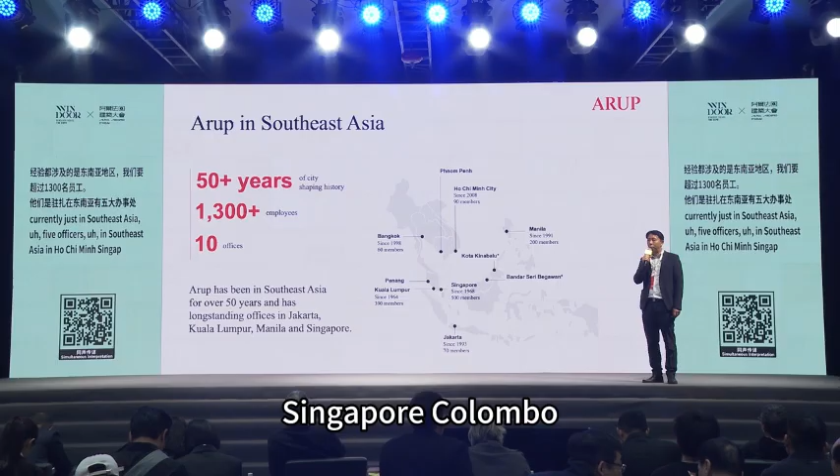So in Arup, we have more than 50 years of experience in Southeast Asia. We have more than 1,300 employees currently just in Southeast Asia, with 10 offices in Southeast Asia in Ho Chi Minh, Singapore, Kuala Lumpur, Indonesia, and Manila.

So I'm going to talk about our Southeast Asia property trends. I'll first start out about the opportunities and challenges that we face in the facade market in Southeast Asia. These are the different aspects or typologies of projects that we dealt with in Southeast Asia.

First, we deal with existing buildings or mixed developments. How do we actually enhance the existing values or the assets in, say, a shopping mall or mixed development? When we delve into that, we talk about sustainability, how we improve the thermal performance of the facade or the building envelope, and how we can reduce carbon.

In some of the sports projects that we take part in, we look at multi-use and also sustainability. Asset enhancement is also an everyday kind of typology that we come across.

When we talk about asset enhancement, we deal with the property developers to explore how we can increase the value of the project, how we can impose sustainability values into the project to make it sell better, and also to portray that the developers themselves are doing their part in terms of sustainability to the environment.

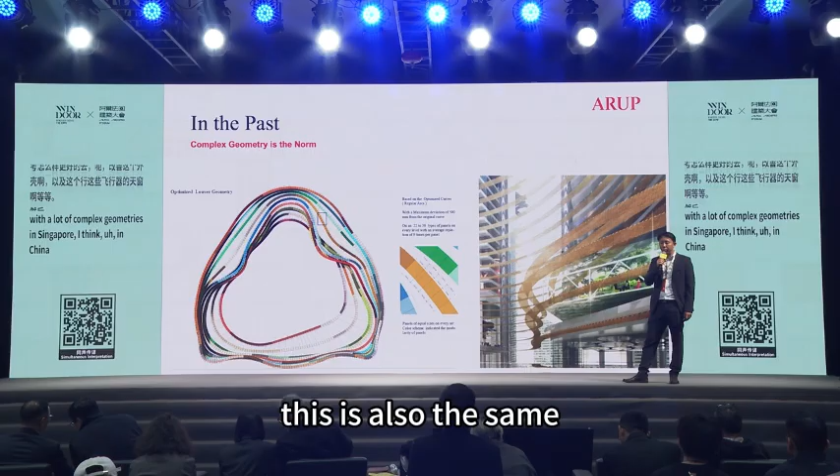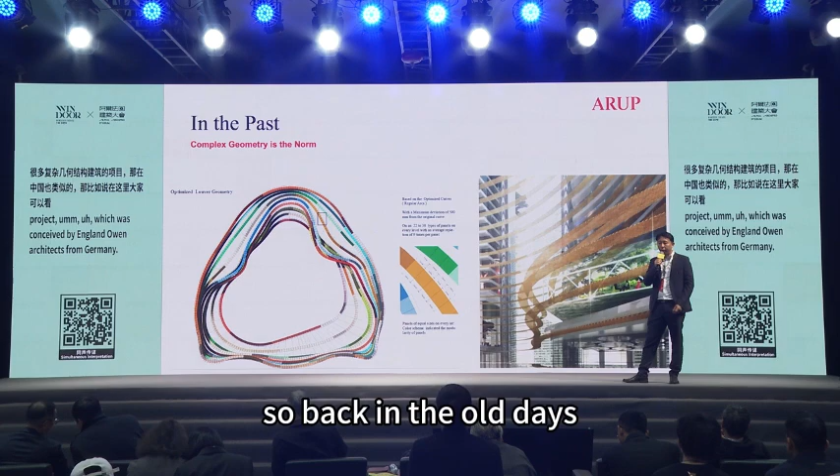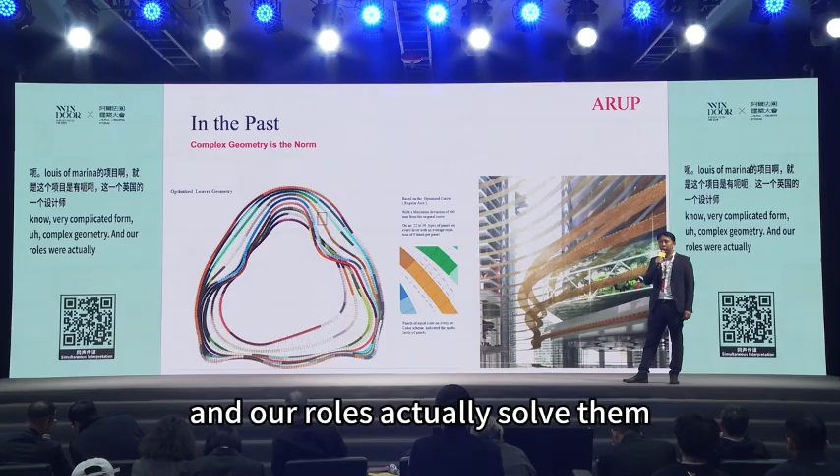So in the past, we dealt with a lot of complex geometries in Singapore. I think in China, this is also the same. This diagram is actually the louvers of the Marina One project, which was conceived by Ingenhoven Architects from Germany. Back in the old days, architects liked to design the building envelope in a very complicated form, complex geometry, and our role was actually to solve them and rationalize the modules of the facade panels, sunshades, or fins and make the architect's intent work.

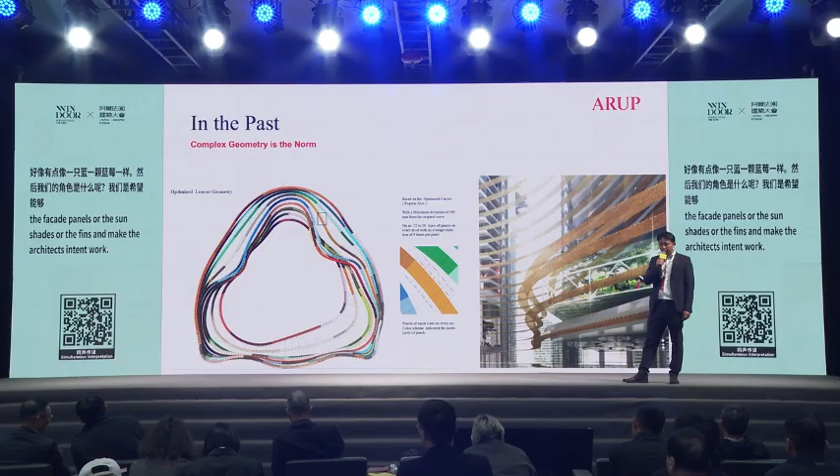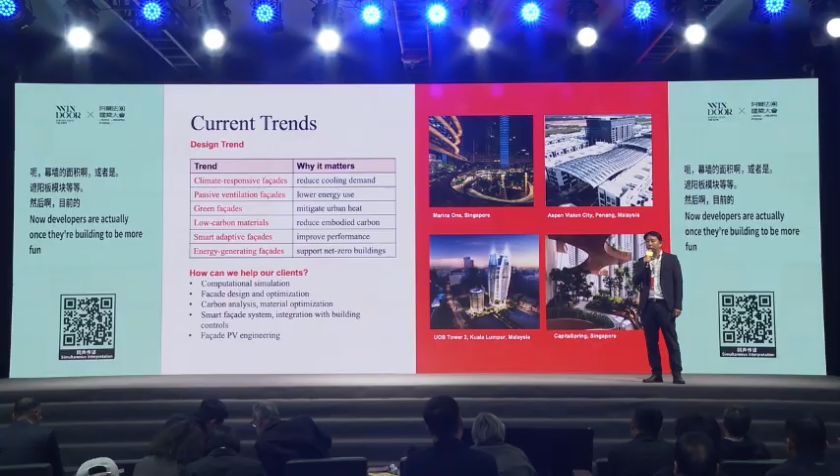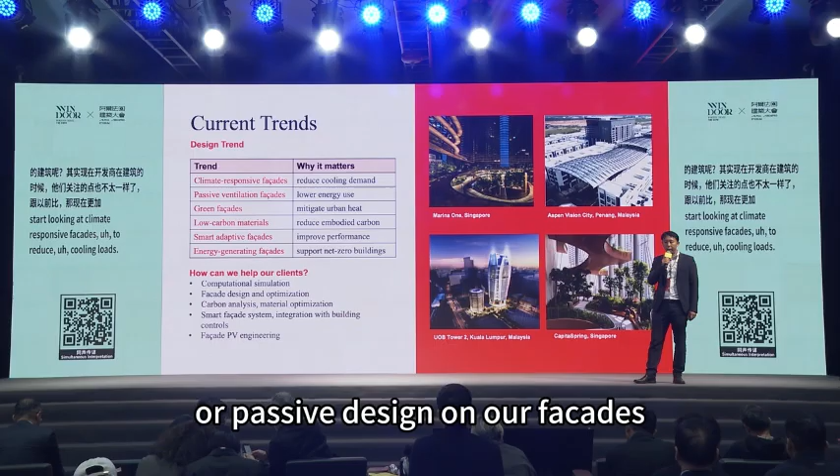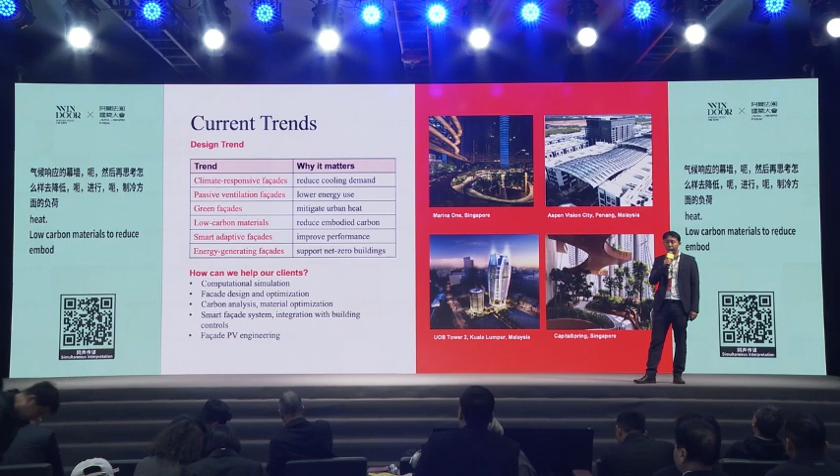But currently, complex geometries is actually passé. Now developers actually want their building to be more functional, more sustainable. So then we had to start looking at climate responsive facades to reduce cooling loads, or passive design on our facades to reduce energy use, green facades to mitigate urban heat, low carbon materials to reduce embodied carbon, smart adaptive facades to improve thermal performance or the energy performance of the building, and energy generating facades to support net zero buildings.

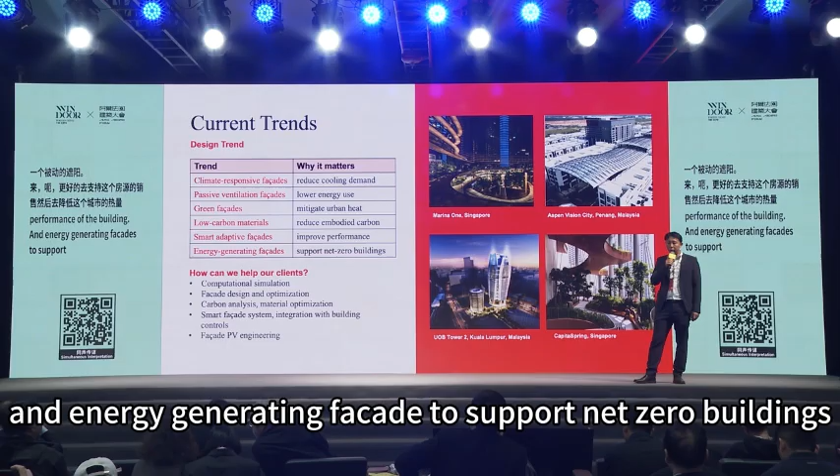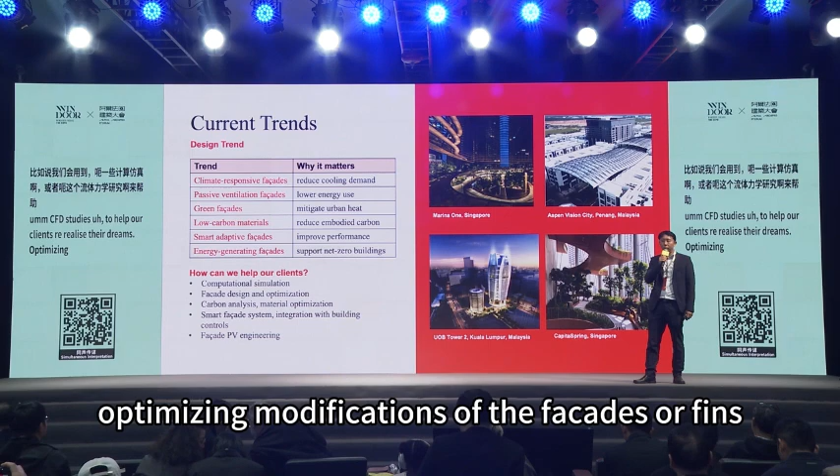So how do we normally help our clients achieve their goals? We do things like computational simulations, CFD studies to help our clients realize their dreams, optimizing modifications of the facades or fins, and embodied carbon analysis to study options on how to reduce carbon footprint.

Sometimes we may integrate smart facade systems, or how to integrate electrical controls for sun shading purposes. And in some cases now, BIPVs on facades.

This is an example of what our Singapore government is trying to achieve in terms of sustainability. For national and public sector projects, there's a big commitment to have 80% energy improvement over projects that were built in 2005.

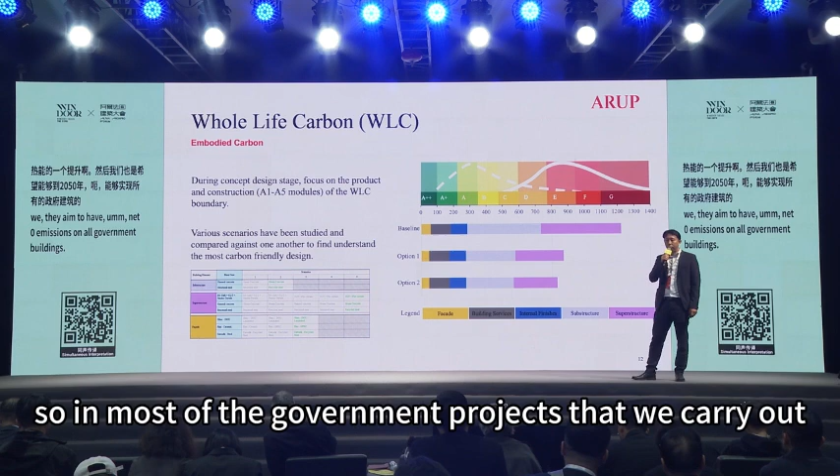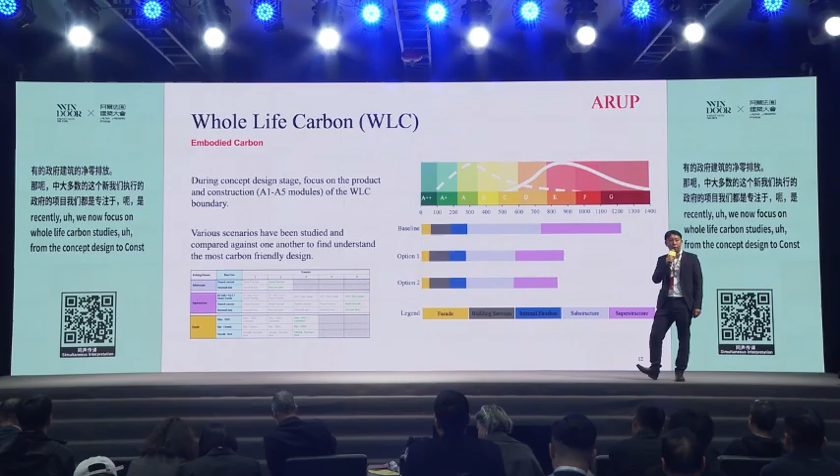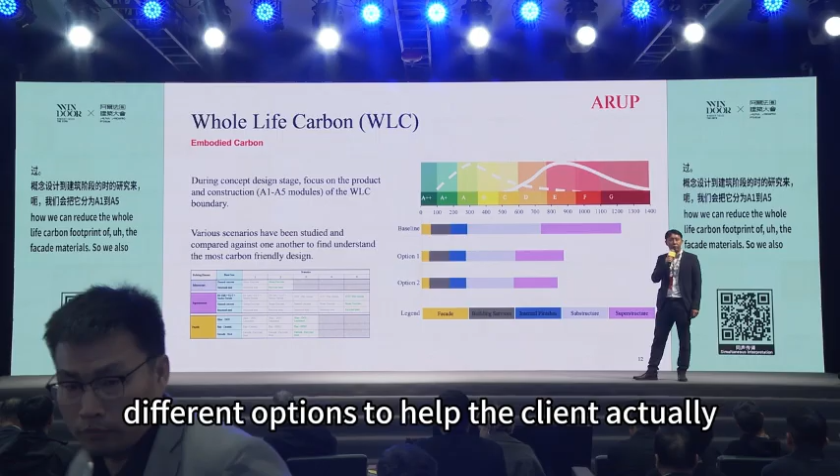And by 2050, they aim to have net zero emissions on all government buildings. So in most of the government projects we carry out recently, we now focus on whole life carbon studies. From the concept design to construction stage, we study in terms of A1 to A5 modules, how we can reduce the whole life carbon footprint of the facade materials. So we also studied different options to help the client reduce embodied carbon.

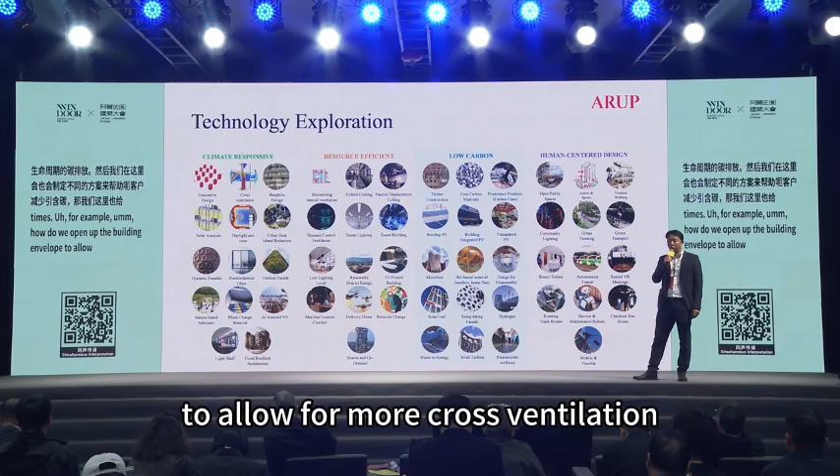These are some of the examples how we explore different technology in current times. For example, how do we open up the building envelope to allow for more cross ventilation through the building facades? The types of glass we can use to improve daylight on the buildings.

In terms of resource efficiency, we looked at smart building technologies, hybrid cooling systems, low carbon materials. In some cases, we look at how we can open up some of our sky gardens to encourage public participation in the spaces.

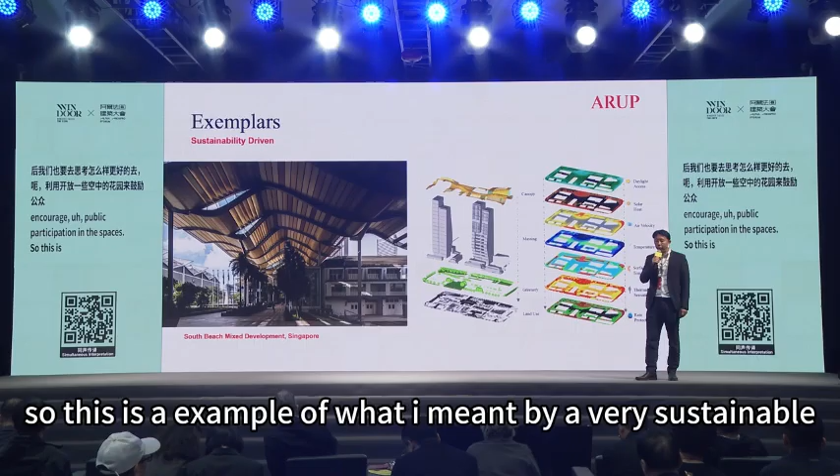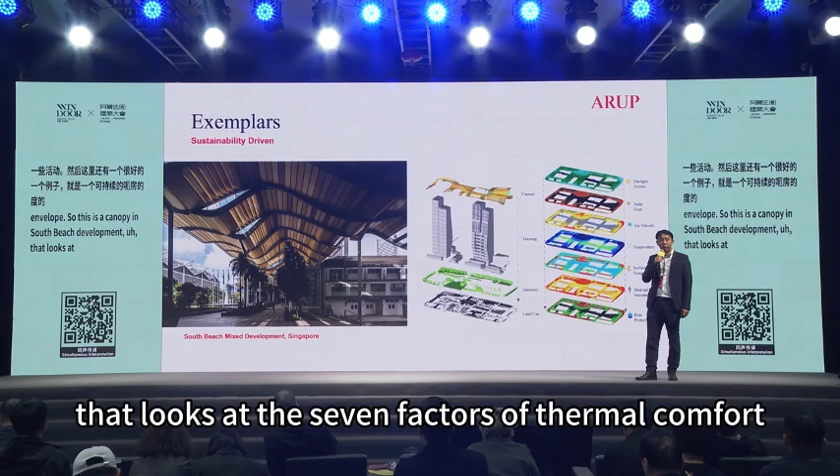So this is an example of what I meant by a very sustainable facade building envelope. This is a canopy in South Beach development that looks at the 7 factors of thermal comfort when you are using the space below, from daylight.

How to harvest natural daylight into the canopy space so that we eliminate the use of artificial lighting during the day, and how we can reduce solar heat gain through the canopies, and how we can allow air to blow through the canopy so that it doesn't feel so hot during the hot afternoon summers in Singapore.

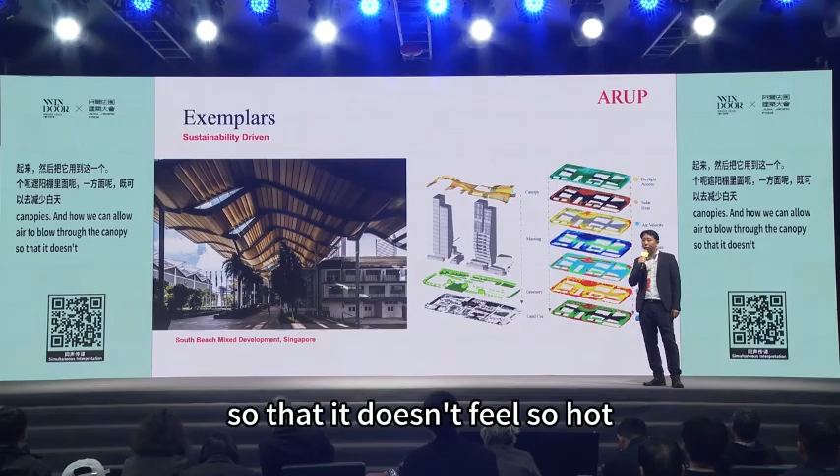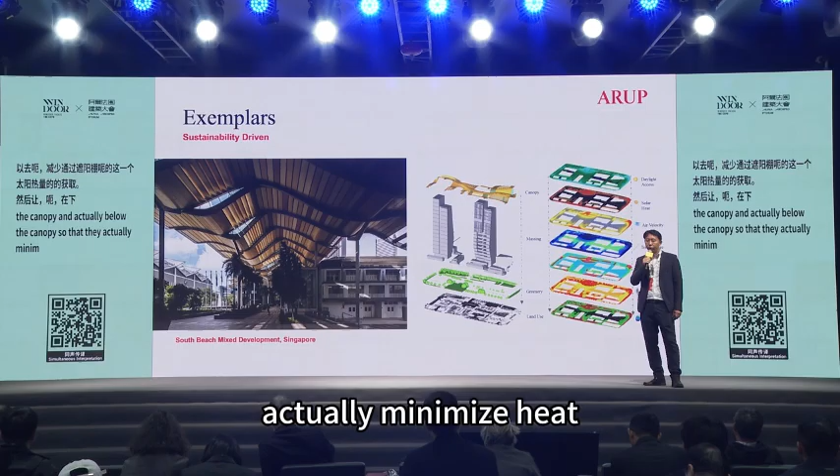We also studied surface temperature of the materials on the canopy and actually below the canopy so that they minimize heat transmission from all this material to the human body. Thermal sensation as well as sun and rain protection.

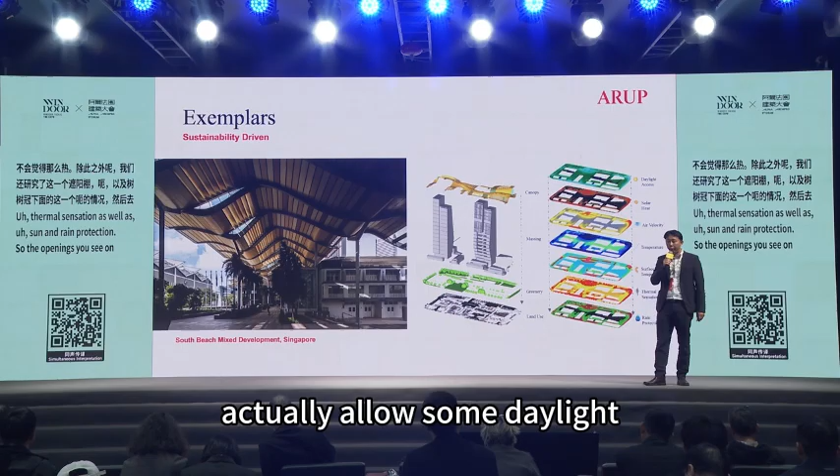So the openings you see on this canopy actually allow some daylight, and the louvers are not closed so that they allow air to flow through, yet can provide the wind-driven rain protection for the spaces below.

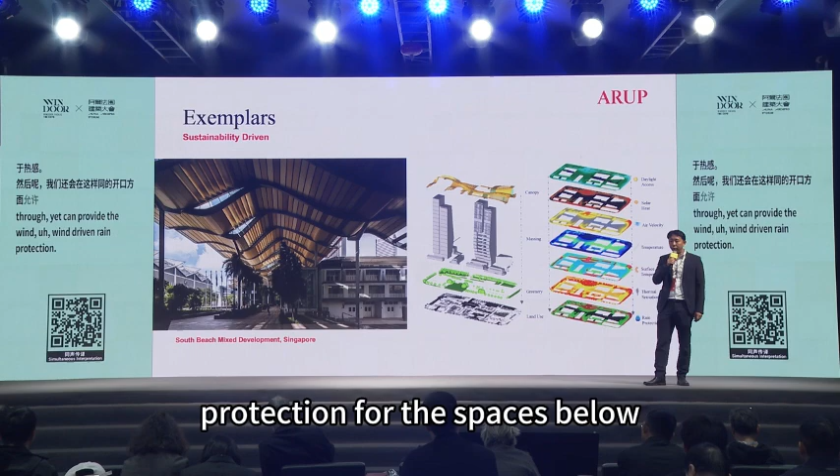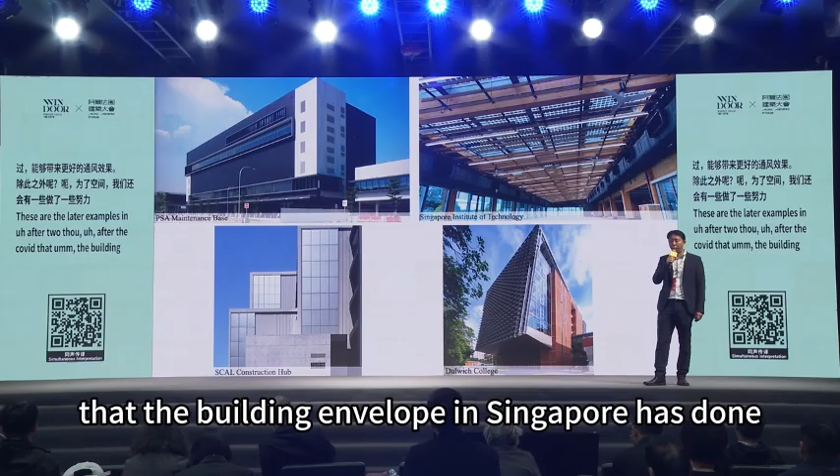These are the later examples after COVID that the building envelope in Singapore has done. Okay, we have BIPV facades, BIPV glass on canopies.

Okay, then now I'll talk about construction challenges in Southeast Asia. These are trends that I think the Chinese market can actually take note of when they try to enter Southeast Asia.

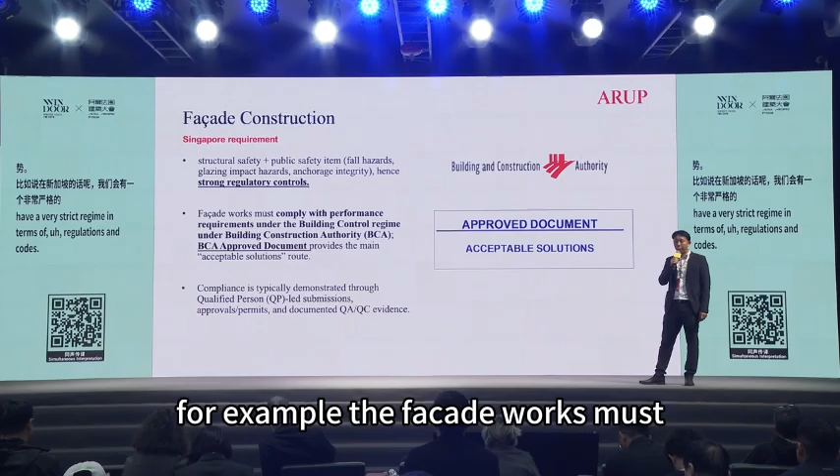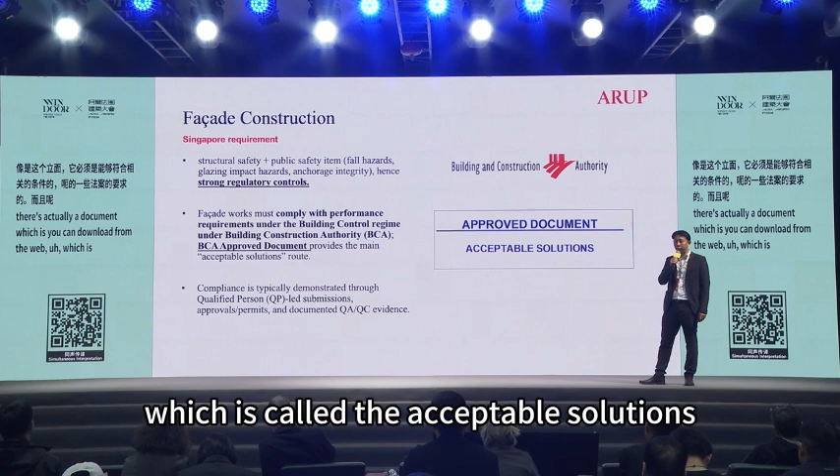Typically, in Singapore, we have a very strict regime in terms of regulations and codes. For example, the facade works must comply to the requirement under the Building Control Act in Singapore. And that's a document which you can download from the web, called the Acceptable Solutions for the Facade market.

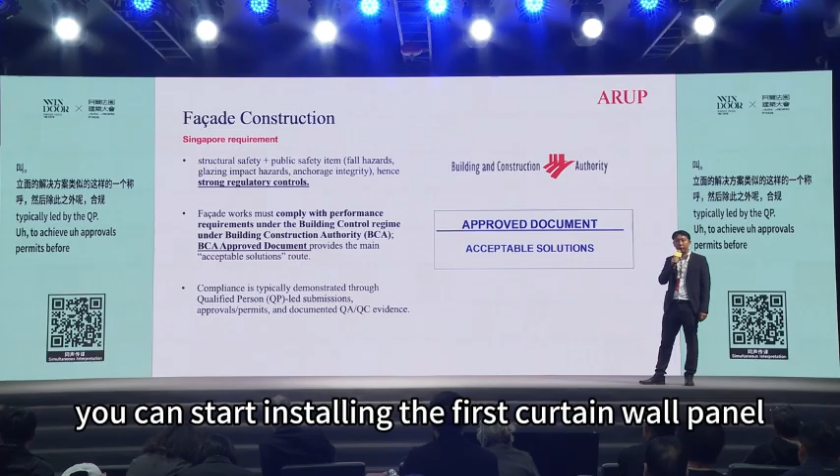Right, compliance is typically led by the QP to achieve approvals, permits before you can start installing the first curtain wall panel. And in that submission, there is also a series of documents that the QP needs to submit.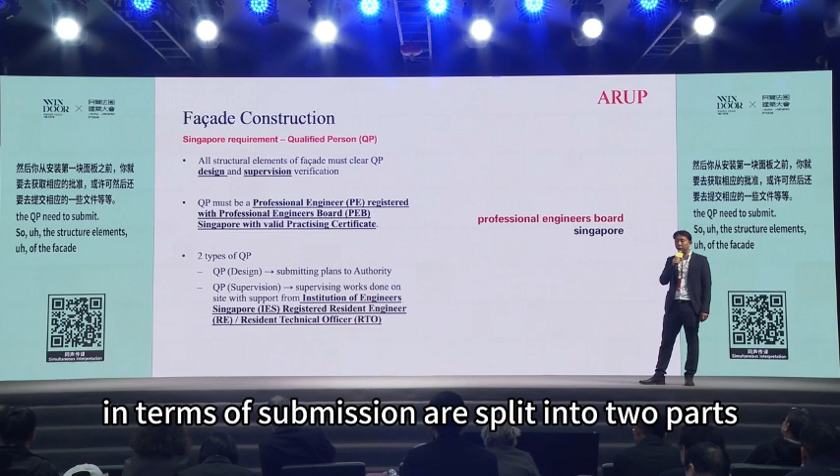So the structure elements of the facade in terms of submission are split into two parts. One is called the design submission and the other one is called the supervision verification. So the QP is called a qualified person. He must be a professional engineer registered with the PE board with a valid practicing certificate.

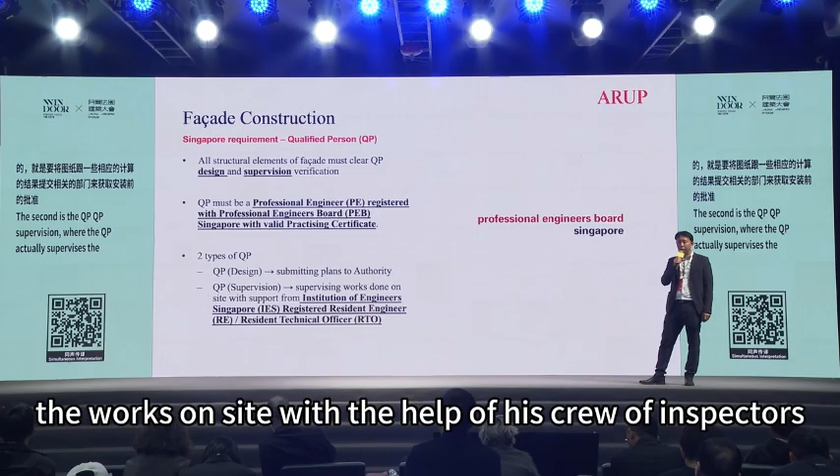Right, in the entire scope of works from design to construction is split into two. One is called the QPD, which is the design, where he submits the drawings and calculations to the authority to get approval before installation. The second is the QP supervision, where the QP actually supervises the works on site, with the help of his crew of inspectors. We call them the resident engineer or the resident technical officer.

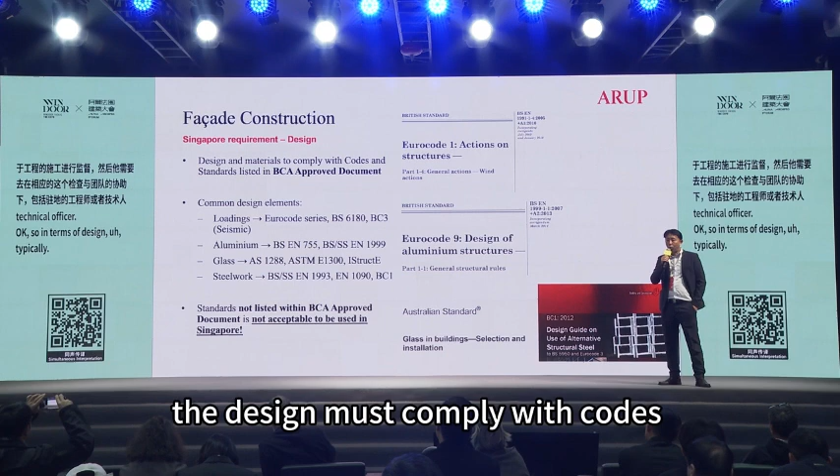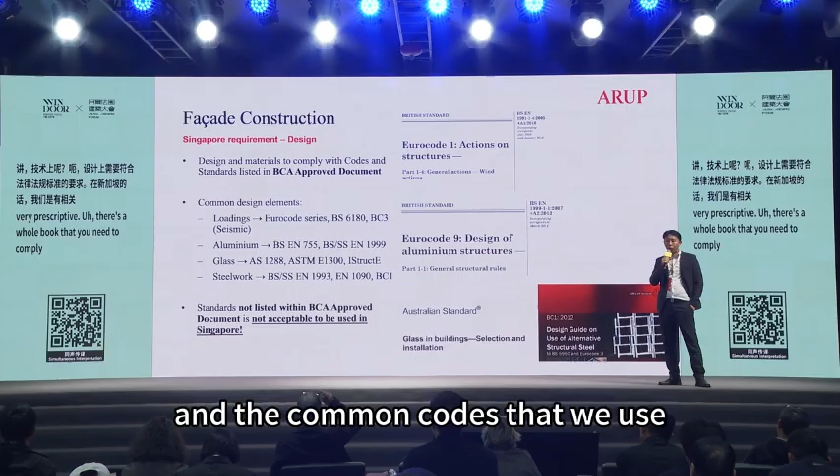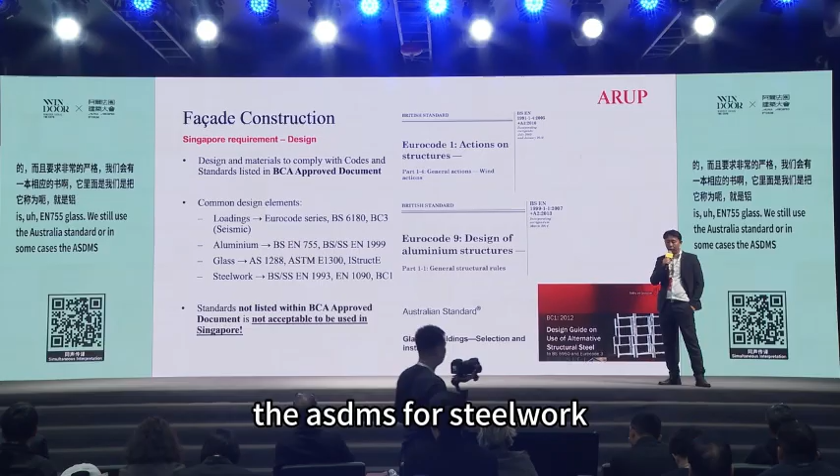In terms of design, typically the design must comply with codes and standards listed in BCA. In Singapore, the codes and standards are actually very prescriptive. There's a whole book you need to comply with, and the common codes we use are the Eurocode series. For aluminium it's EN 755. For glass we still use the Australian standard, or in some cases the ASTMs. For steelwork, we still use the British or Euronorm 1993.

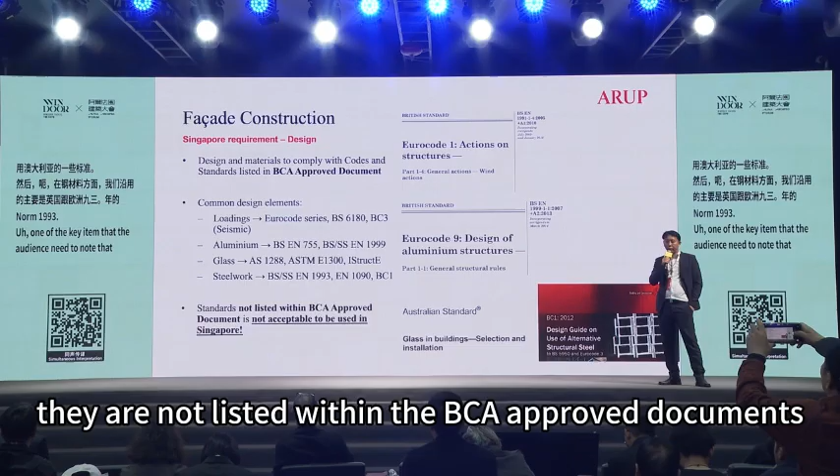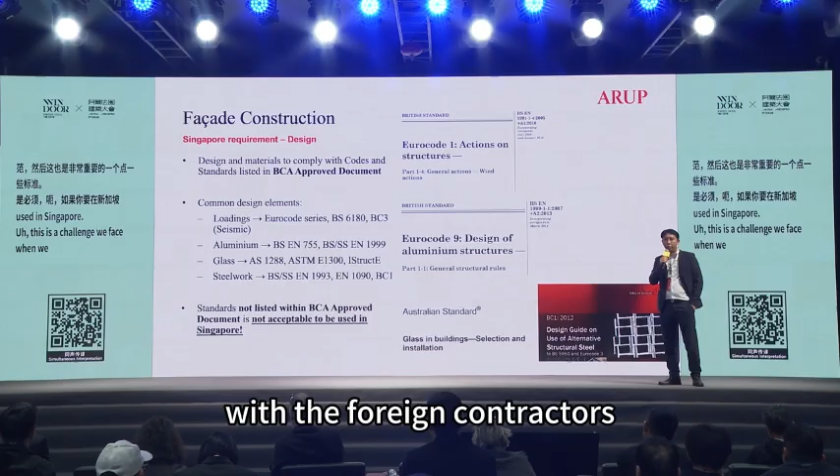One key item the audience needs to note is that standards not listed within the BCA approved documents, other than the codes above, are not acceptable to be used in Singapore. This is a challenge we face when dealing with foreign contractors, where they insist on using their local standards and try to impose them in Singapore, but unfortunately this cannot be used because our local BCA does not recognize them to be submitted as part of the document submission.

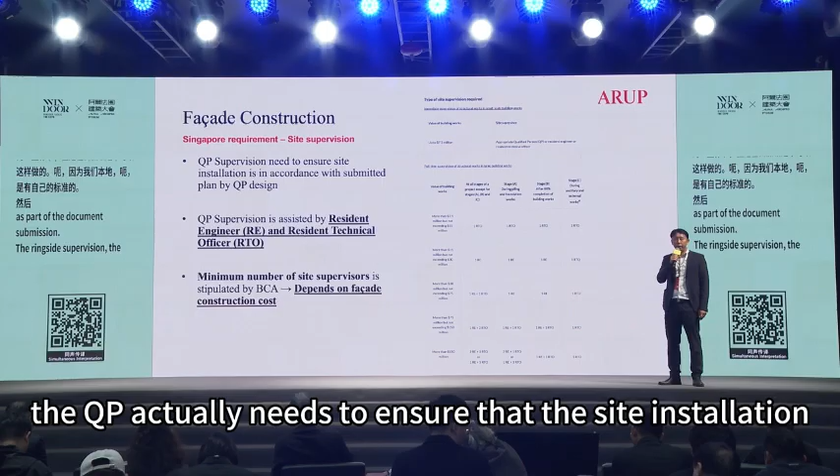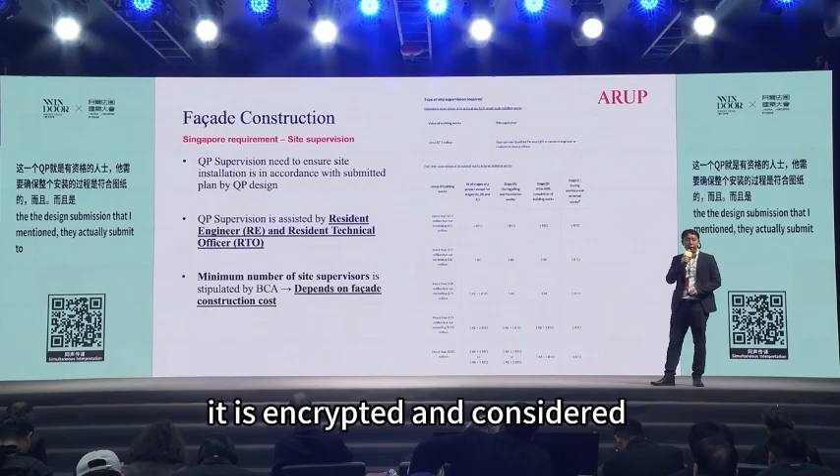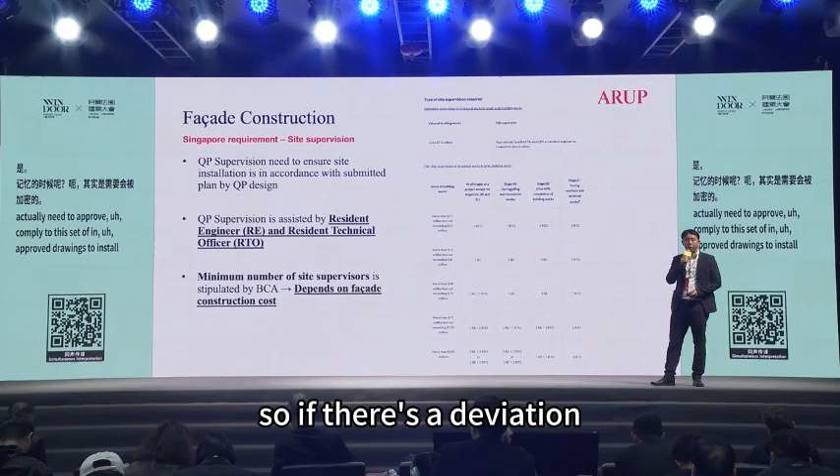During site supervision, the QP needs to ensure that the site installation is in accordance with the drawings. During the design submission, they submit to BCA, it gets endorsed and is considered approved for construction. So on site, they need to comply with this set of approved drawings to install. If there's a deviation, this needs to be discussed with the QP before you can proceed to the next stage or rectification works. The QP supervision, which is the PE, is assisted by the RE or RTO

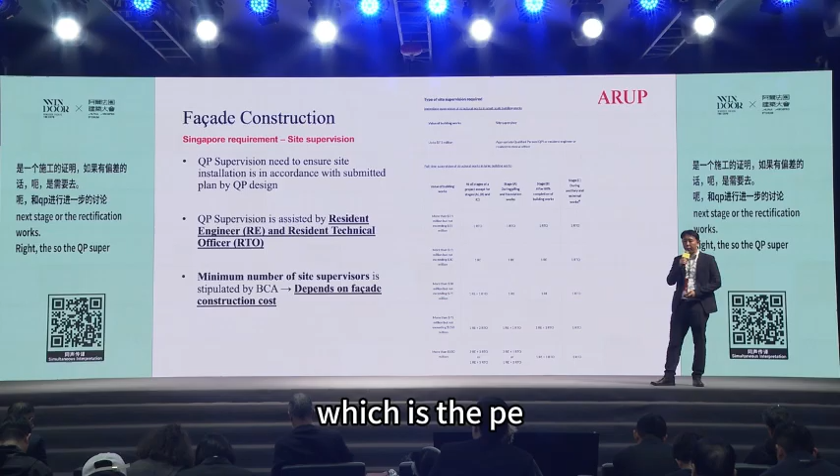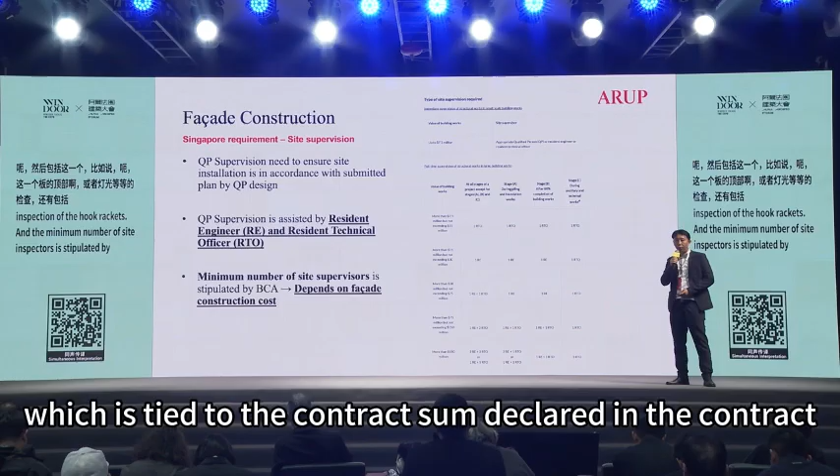to help do the day-to-day inspections, such as welding inspections, torque of the bolts and nuts, or in some cases inspection of the hook brackets. The minimum number of site inspectors is stipulated by BCA, which is tied to the contract sum declared in the contract.

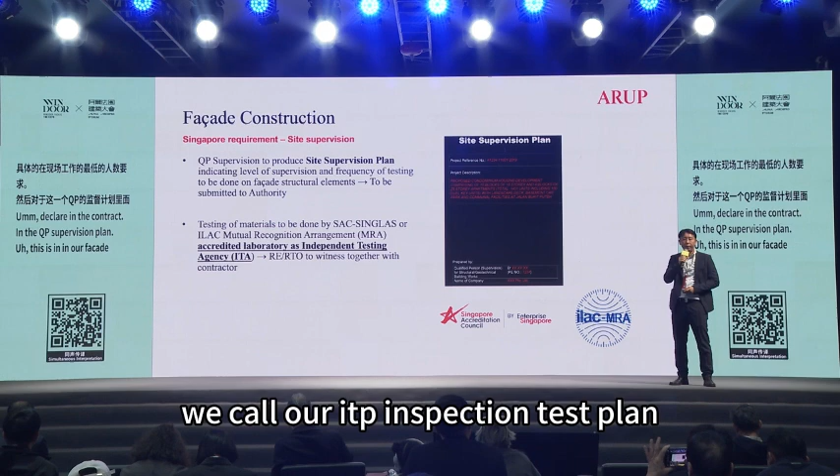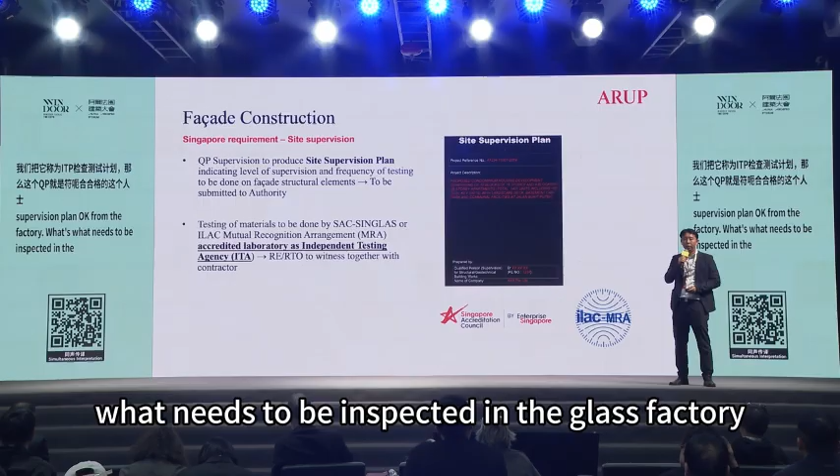In the QP supervision plan - in our facade world we call it the ITP, inspection test plan - it is quite similar, where the QP needs to write a supervision plan from the factory: what needs to be inspected in the glass factory, what needs to be inspected on the extrusions and assembly inspections, glazing inspections, all the way to delivery, all the way to site. So it's similar to the ITPs we always draft during our projects.

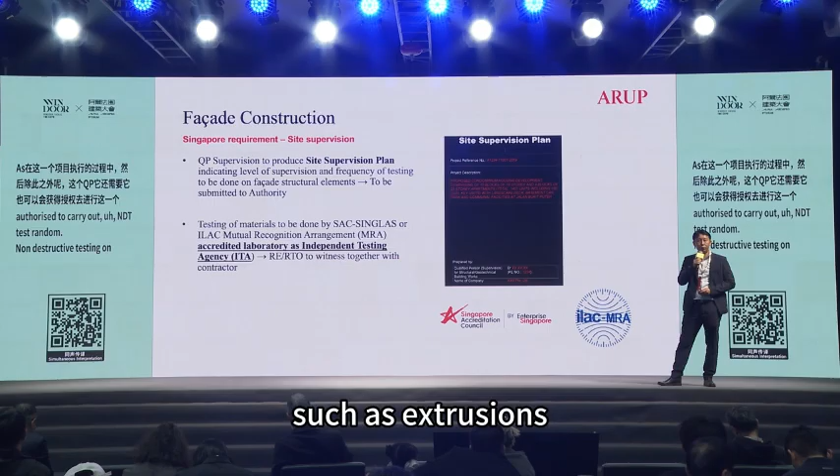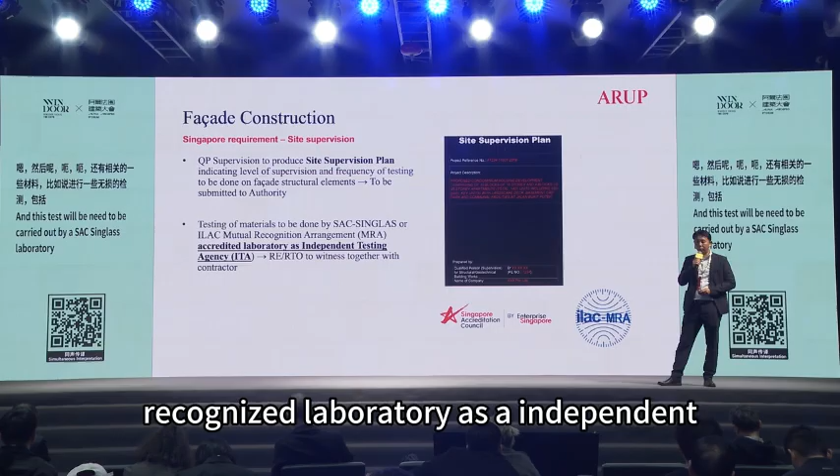On site, the QP is also authorized to carry out NDT tests, random non-destructive testing on materials such as extrusions, bolts and nuts, fire stops, glass, etc. These tests need to be carried out by a SAC Singlas recognized laboratory as an independent ITA, and the RE or RTO on site will be asked to witness together with the contractor.

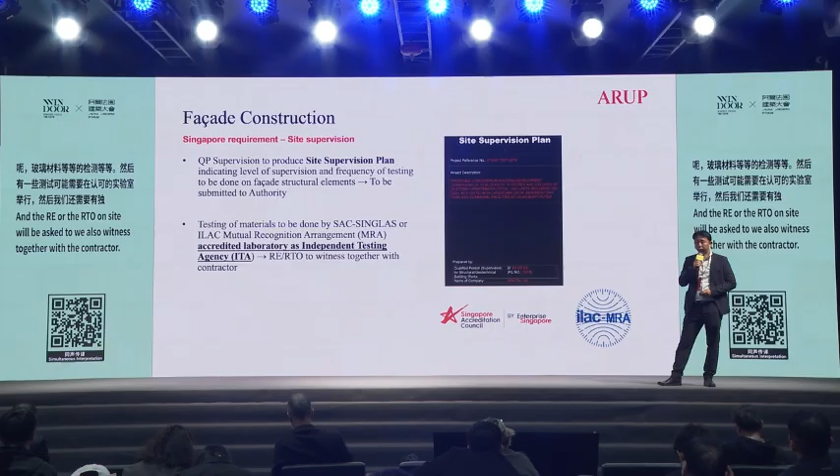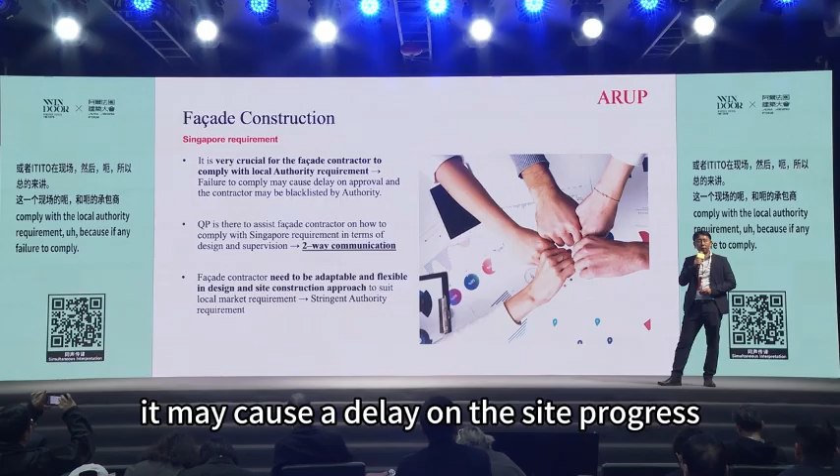In summary, it's very crucial for the facade contractor to comply with local authority requirements because any failure to comply may cause a delay in site progress. And in some cases, if accidents happen, the contractor will be blacklisted by the authority. When you get blacklisted, you can no longer participate in government projects for a number of years.

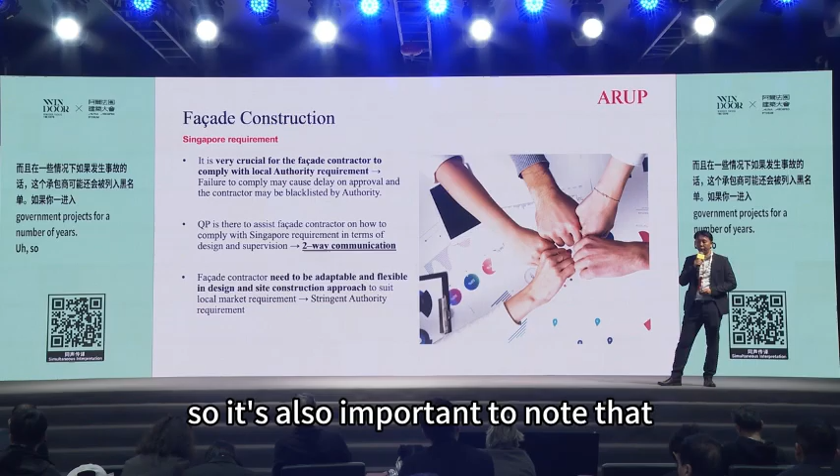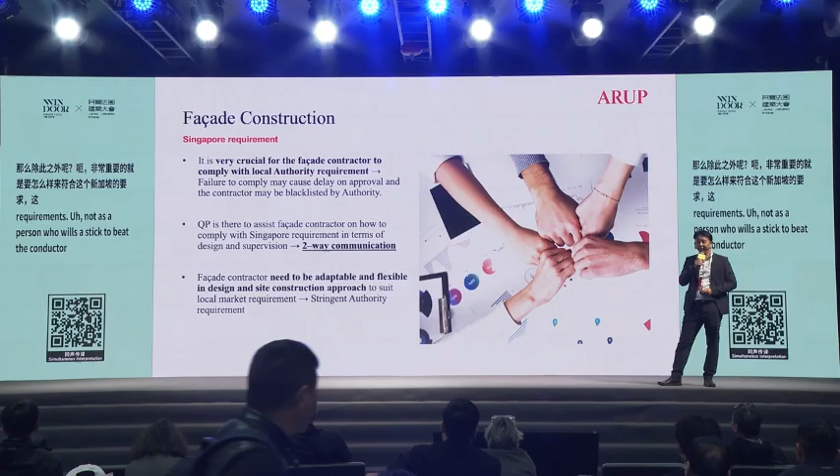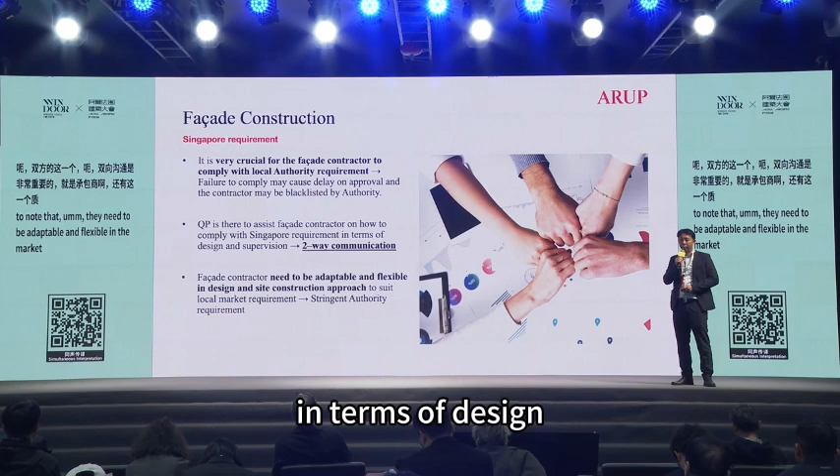It's also important to note that the QP is there to assist the facade contractor on how to comply with Singapore requirements, not as a person who wields a stick to beat the contractor. So it's more of a two-way communication between the contractor and the QP. Lastly, the contractor needs to be adaptable and flexible in the market in terms of design and site construction approach, so as to meet the local requirements.